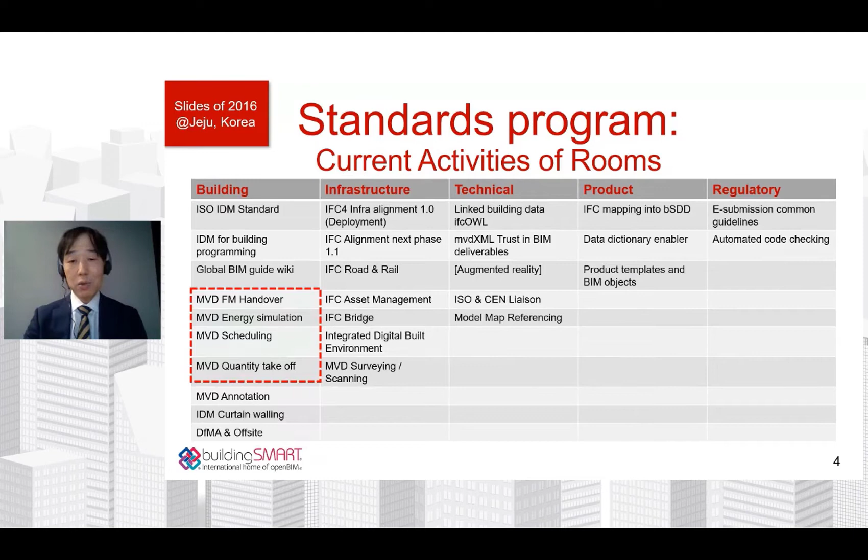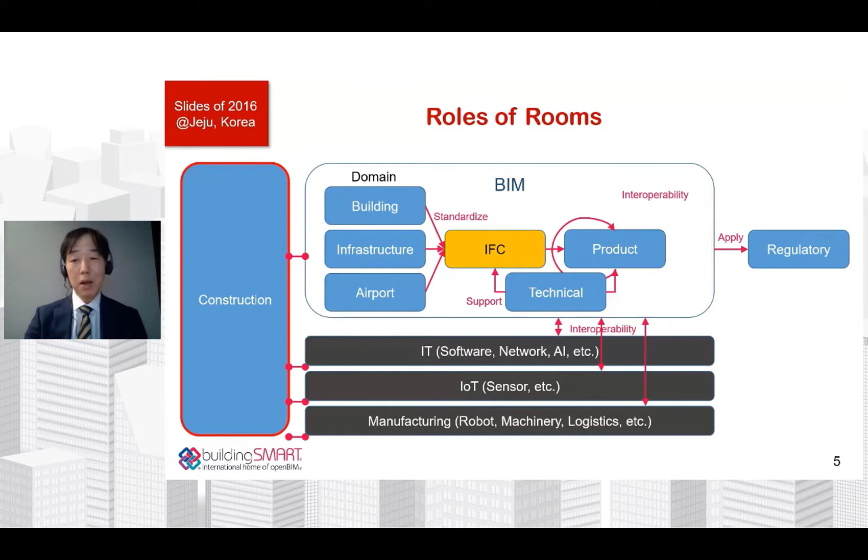There are many file formats and data schemas in each domain. So we started to establish interoperability between those data and try to migrate them at real construction sites. In one word, we try to start data management of construction site.

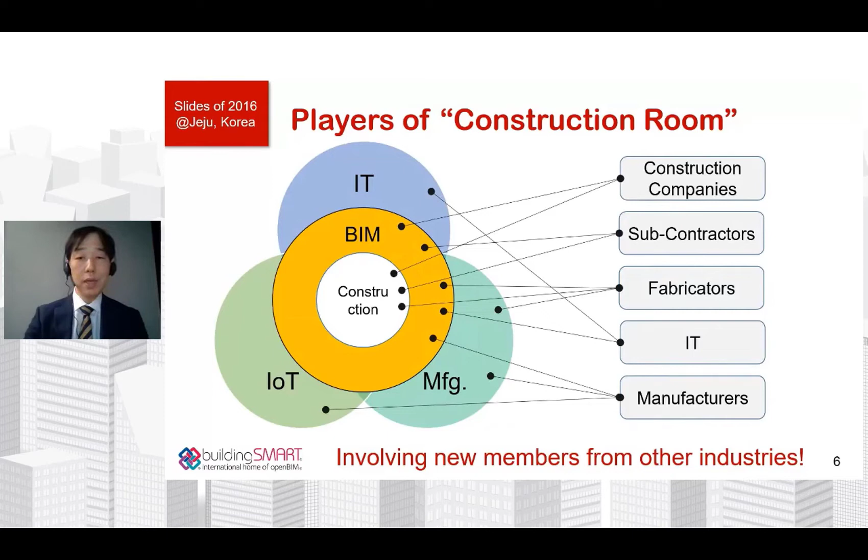So we assume that attendees of CR were not only from construction domain, but also from IT, IoT, manufacturing industries as well. So our targeted domain is not single, but a combination of different domains.

First one was BIM plus construction. 6 years ago, usage of BIM in construction phase and field was not as popular as today. We started to use the word construction BIM, and it has been rapidly spreading, and now it is recognized as a major part of BIM usage in building life cycle.

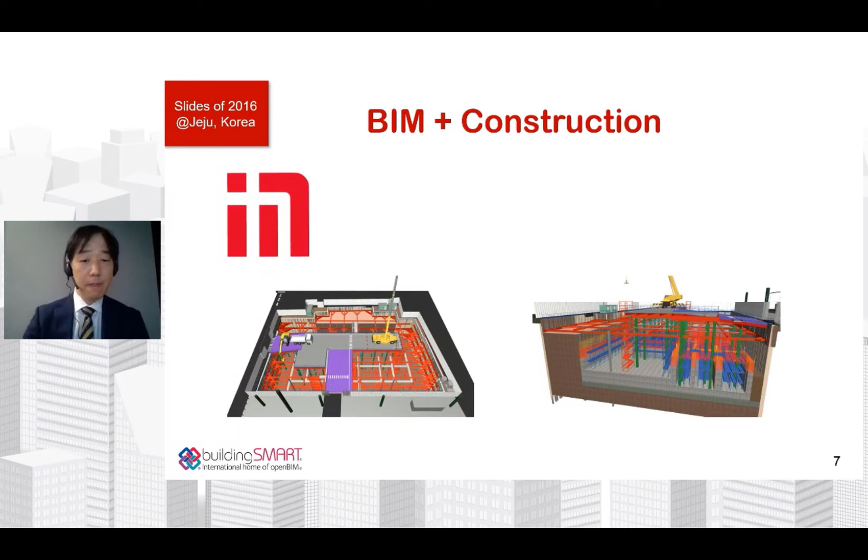Next is BIM plus GIS and BIM plus AI. TensorFlow was an AI engine developed by Google, and anyone could start to use AI and apply deep learning of image to construction domain.

Now, we have many cloud-based BIM tools which can attach and store remotely divided data sources and use many analysis tools online as well.

Next is BIM plus drone plus laser scanner. Now it is very popular to measure landscape with UAV, used in many civil engineering projects and large-scale building construction projects as well. Cloud-based automatic navigation systems, such as DroneDeploy, are used at construction sites as well.

Next one is BIM plus 3D printer. This technology is still under developing stage, but some construction materials, such as temporary materials for formwork, are created by 3D printer at factory, and some trial building automation with large-scale 3D printer has started.

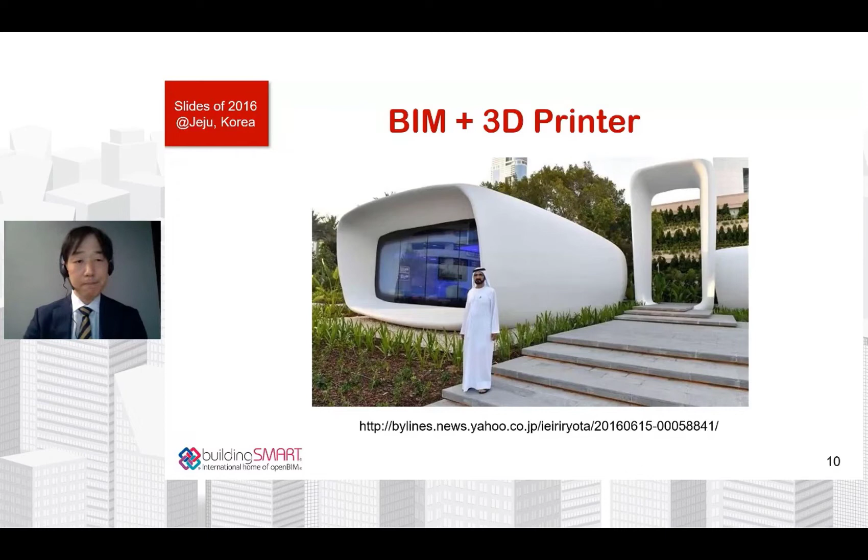Now, virtual reality is a handy tool, both cost-wise and operation-wise. But there were few use cases to use them in construction sites six years ago. Now we can use a variety of excellent tools, not only virtual reality, but mixed reality and augmented reality. I believe that IFC format had a big role to bridge BIM and XR technologies.

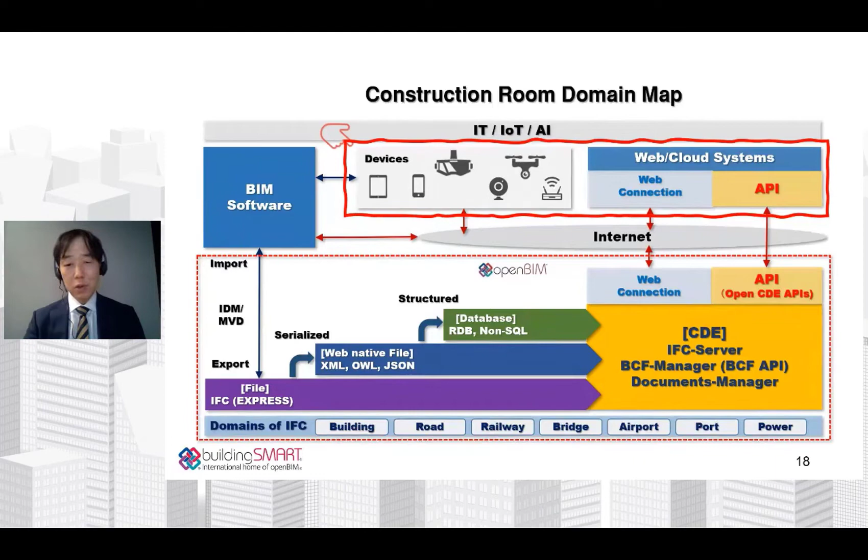From now, I want to present the updated construction room charter documents.

Construction room is categorized in user-focused rooms. We are fundamentally based on user side, helping to use IFC and related standards from beginner to advanced person.

Our field is mainly construction phase and pre and post construction phase as well, and we create open BIM based workflow.

There are our vision and missions: advanced digitalization of construction, incorporate forward-looking construction technology into the development of open construction solutions and standards.

Developed best practice of construction site management based on OpenBIM, and provide OpenBIM education to the industries.

We also have an approach to create the method for BSI standardization. First, share the use cases and store them to a use case management service, and create IDS, which stands for Information Delivery Specification, and MVD for extending use and interoperability of BIM data.

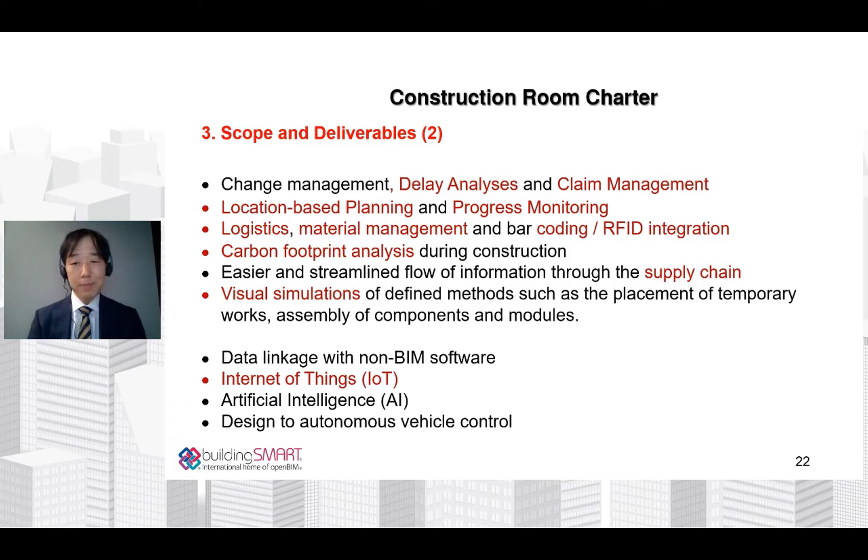If you are trying to establish construction room in your local chapter, please let us know. We can help to create charter documents and adapt your local activities.

Starting up the community is the first step, through which we can input our knowledge and receive many feedbacks from the construction field.

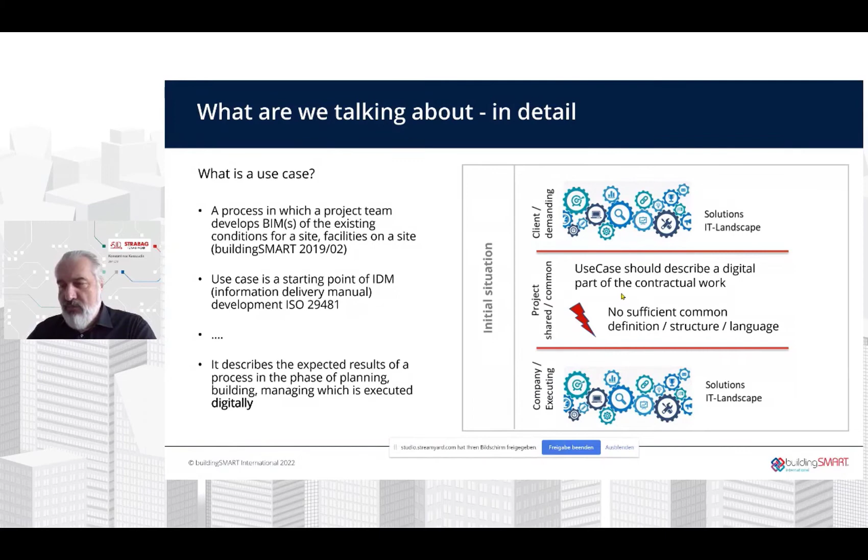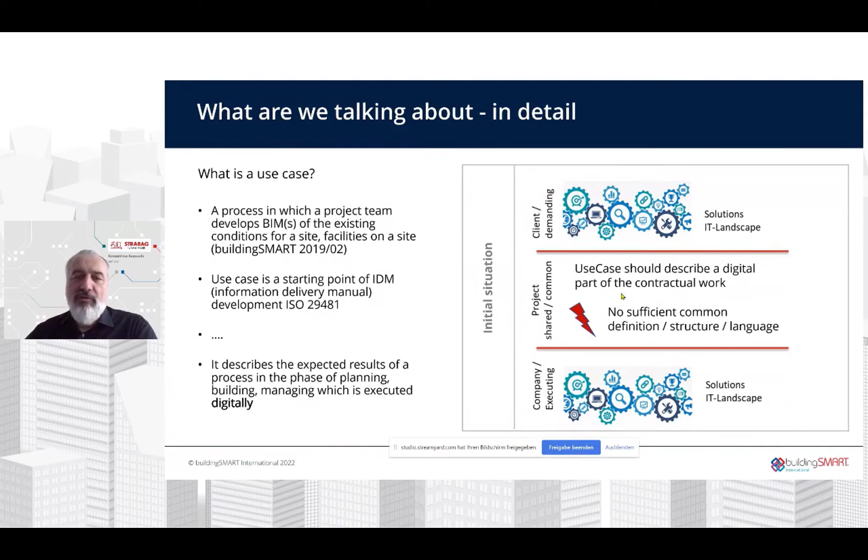At the moment we have BEPs and ERs written, and they are always written and executed individually, and this causes some difficulties. So if we look at the other side, what is the actual problem? If we have this insufficient common definition, structure and language in use cases, there is an impact.

The impact by the moment is that every participant writes down his own use case, which makes it difficult because all the people have to read all the use cases to understand what we do in the market. This makes it somehow difficult to connect company systems to fulfill the requirements described in the use cases automatically to our already set up solutions in every company, and we don't have the time to add or connect that solution always by hand.

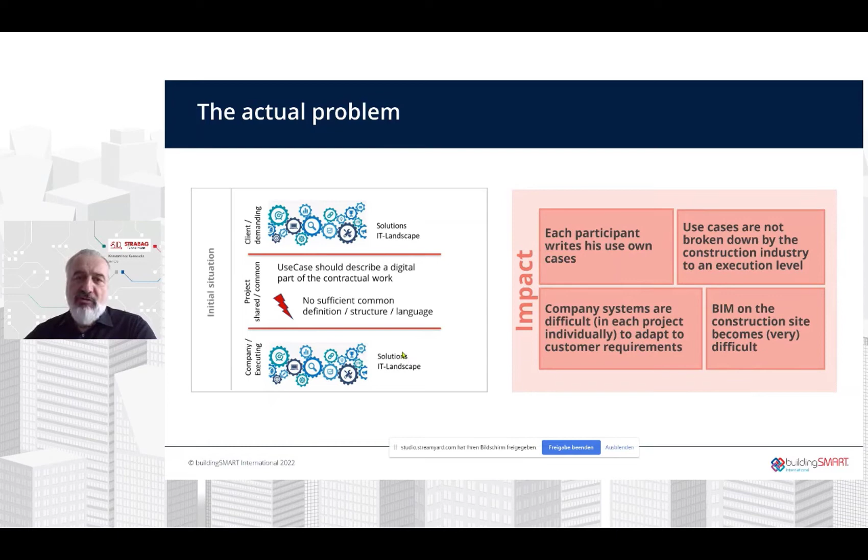The next problem we face is the use cases are still not broken down by the construction industry to an execution level, or by the planning offices to an execution level between planners. We have a big discussion ongoing on the high level about what customers require, but what about the execution level? In summary, this makes it very difficult to connect really digital solutions to a construction site, because on a construction site, as in the planning processes, we have a lot of interactions, a lot of processes going through companies, connecting companies.

So if we want to make this somehow better, this is an actual discussion happening worldwide: we have to define, we have to find a common definition of what is the use case. As you see on the right upper picture, a use case is a process, a frame of that. It has an input, an output, roles, skills to fulfill it. It's a digital service at the end we have to fulfill.

If we look a little bit in the middle of the project now, we see a structure appearing. And we need this structure to understand each other - where is this use case really allocated? Is it a use case defining what a client is asking for? Or is this, on level 3, a use case we share between execution companies to fulfill what the client is asking for? This discussion, by the moment, is I think still needed and ongoing, and will hopefully end in a common definition, structure, and more than that, syntax and semantics, so we can understand each other about what we are talking about and what it means if we describe a use case.

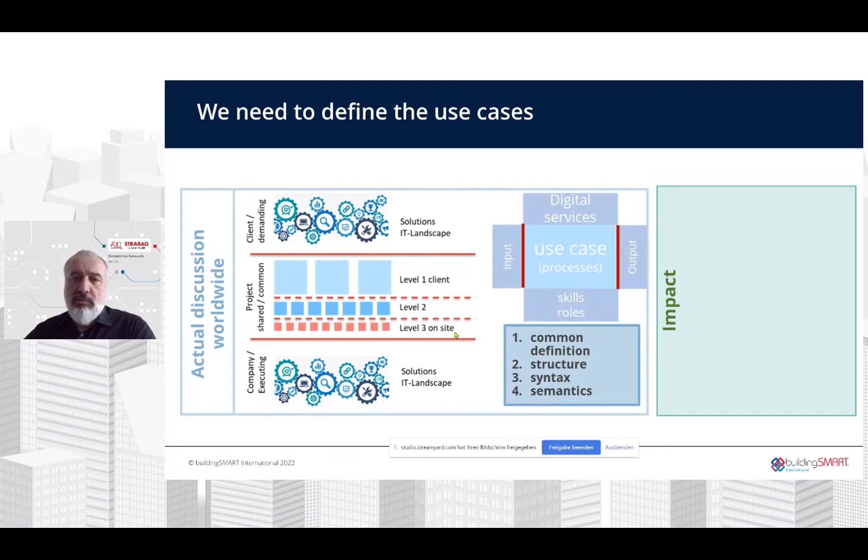This will have an impact too. The impact this time is a little bit better, is green. So the customer request is broken down to the execution level. So the customer sees at the end what is inside what he asked for, and how it is executed.

It makes it possible for us to have reproducible digital processes, and by this, a standardized connectability to the company solution landscape. The company solution landscape will always remain something internal, either client or execution company. But if the middle part, which is common and shared, is understood and agreed what we do on a construction site, it's much easier to connect our solutions there.

And this will help us establish process chains independent from company size to achieve this digital collaboration. Imagine if, by the moment, it's a big effort to always connect your solutions to the demands of a client on site, but also the demands of collaboration, even for bigger companies - how big is this effort for a smaller company who always has to connect itself to different general contractors, to different clients? It makes it really impossible, even for smaller companies, much more than for bigger companies. So therefore, I think it's a very helpful and needed thing to make this digital process chain really happen in the construction industry, or the construction sector as a whole.

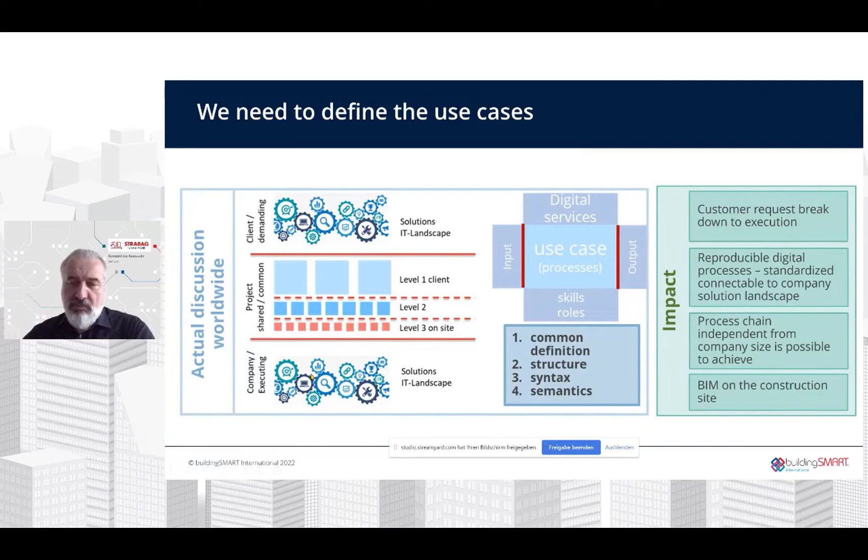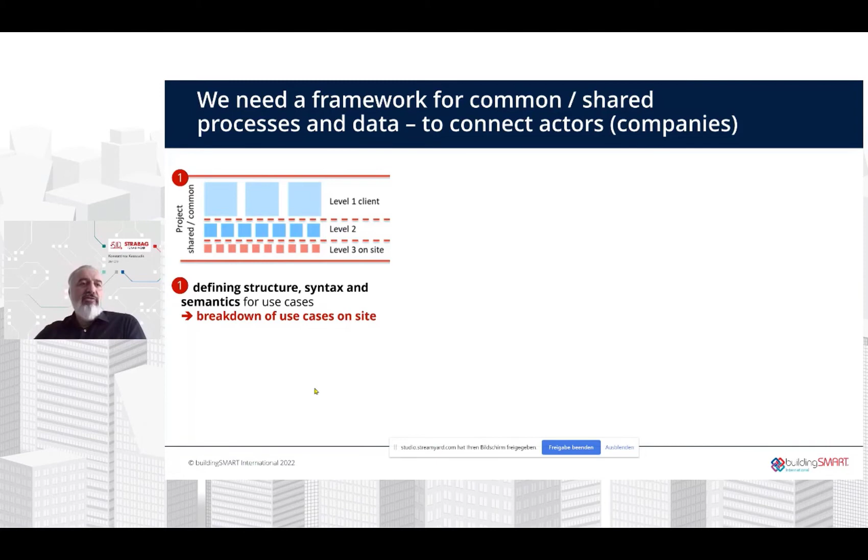So if this is what we need to define for use cases, and we are working on that, we have to think one step further. We need a landscape, a framework, to connect processes and data to be able to really execute that. So if this is what we want on the top level - this is what we want to achieve. The first thing, as I discussed, is defining a common structure, syntax, and semantics for use cases, and to make this breakdown of use cases on site. This is ongoing. Once done, or meanwhile we do this, we need a platform.

We need a platform to store all this information, and we need a concept to get from structured document to these steps, totally to the right, to machine executable data model. And we are still not there. We are at the beginning.

If we don't start with a structured document, we will not reach the next step, which would be a machine readable document, and then machine understandable content. We need syntax and semantics, because to understand something, you have to make it understandable. Once we've taken these steps, we can achieve a machine executable data model, helping us make these connections faster, more efficient, and of higher quality.

This is a part I think we discussed already in use case management, buildingSMART. I thank the colleagues very much for setting up this use case management platform. I think this is a very big move from buildingSMART to start here with structured documents and discuss the next steps of functionality and services within buildingSMART.

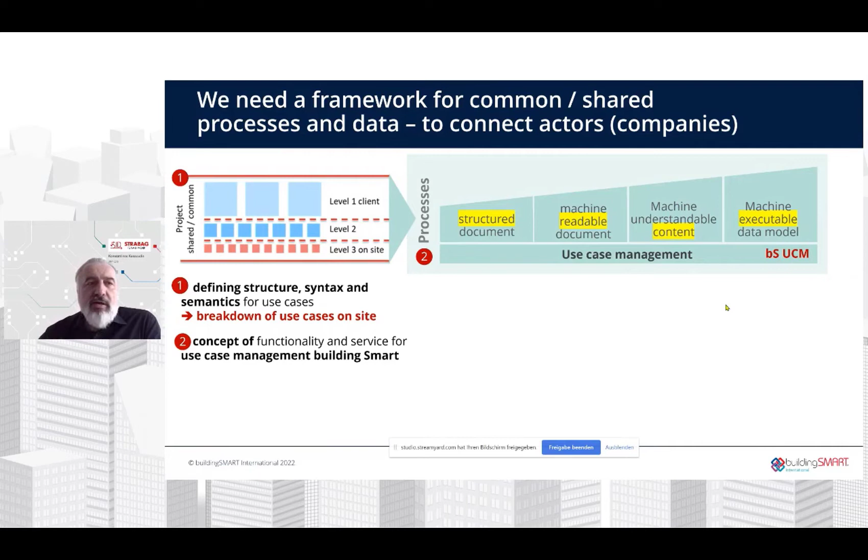But if we have the processes, at least the public and common and shared processes defined, that's not where we want to stop, because what we need more, to have a complete solution, is to connect processes to data. There you see also the big importance of these process definitions. The process definitions give us a filter for all the data we have.

We have a data sea, big data pools, and we can't handle these data pools if we don't have, as a criteria, at least a process criteria, the use case management to give us a breakdown, a concrete selection of data we need for the specific process. Therefore we need a concept of functionality and service for data to be filtered and connected by use cases, to fulfill them. This is a very big thing we have to discuss, I think, in the future.

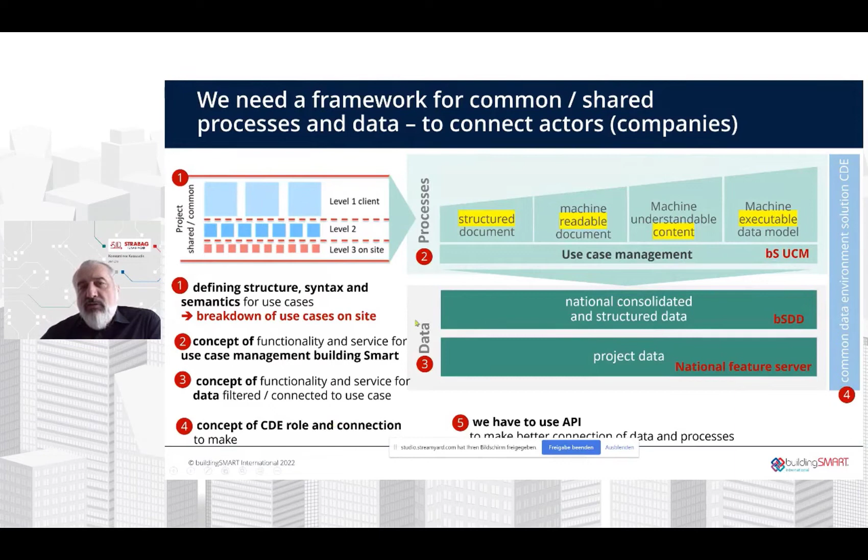So this is my proposal, my presentation to give you an idea about the importance of use cases, and why we are asking all the examples we do in the construction realm to be reflected as a use case on the use case management platform.

As a summary, use cases are one of the most key elements of digital processes. They are, to my understanding, the key to common understanding of what we do on the construction site, so as not to end like the example of the Tower of Babel.

So as they are shared between all participants, they must be described on a platform, a common and external platform, to achieve at least the most important three things we have to achieve to make this smooth collaboration on the construction site.

We need this common understanding of structured processes as described. We need this to be able to make a repeatable connection to the IT landscape and solutions of all participants. And this is the base for digital logistics and fabrication processes on site, shared by all execution companies and all planners. Otherwise, we will not be able to do that seriously.

So the ongoing discussion, as I've shown you, is still ongoing about how to structure and define the use case, but this will come to an end soon, I think. Once the ongoing discussion on a common definition of use cases is finalized, I see a great demand for a functional use case management, best connected to data management, and this will progress very fast.

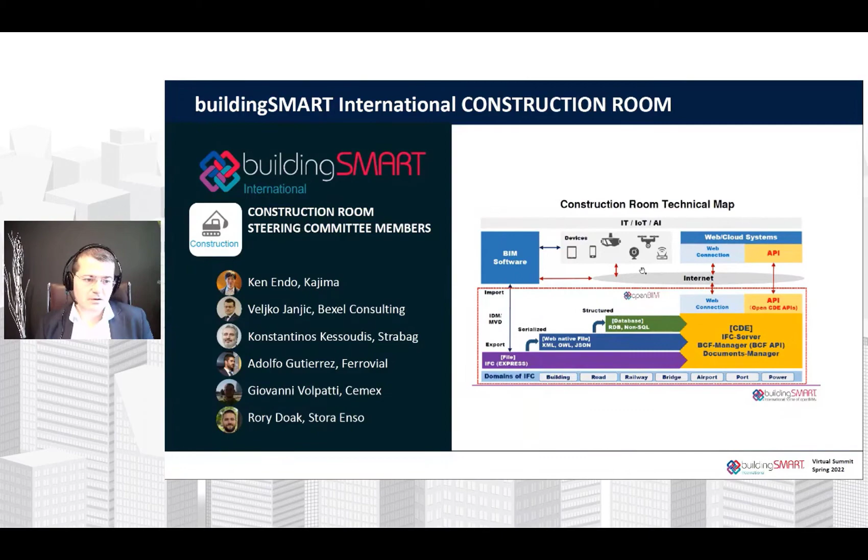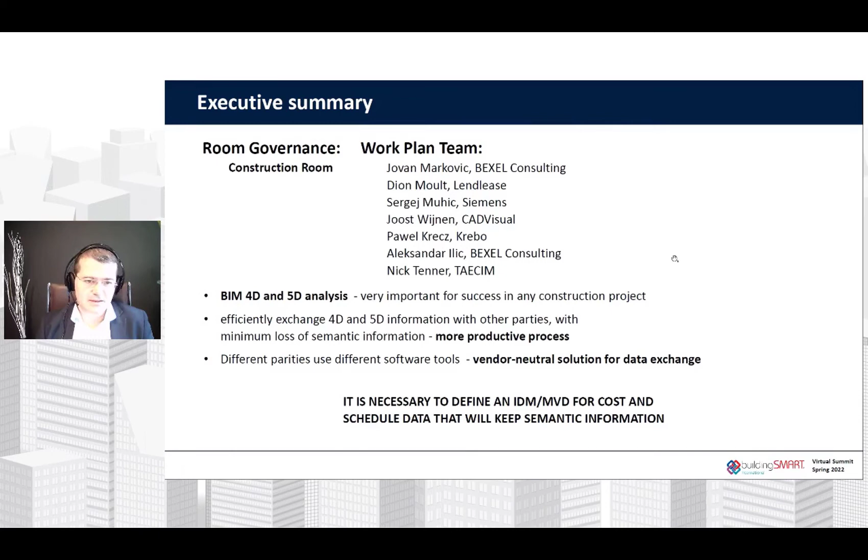As this is our construction room, the project for IDM and IFC enhancement is coordinated by our construction room. Here are some members of the team who are essentially involved in this project today. I would like to invite you all to join if you want. I would especially like to thank Dion and Jovan for their great contribution to what is currently developed in the IFC standard and what can be enhanced in the future.

As has been said a number of times before, any new standard has to be fully neutral and enable interoperability between various tools and platforms. It also has to be fully robust, so not dependent on any company or region-specific standard and common practice. For these more detailed structures which can be localized and more specific, we have, of course, an excellent option to use BSDD. There are also some ideas which might help in the future to slightly enhance BCF.

For example, for BIM-based look-ahead plans or progress monitoring, tendering packages, and other use cases, BCF could be very useful. It needs to be slightly enhanced in the future if possible, and this will allow us additional flexibility.

As Konstantinos mentioned, everything starts with use cases. Today we have many stakeholders, and what I have to emphasize here is we also have a lot of changes and updates. And if we cannot have any automation of those processes, any templates, any standards, it's going to be very difficult to manually handle those changes. So one of the big ideas, which we've discussed many times, is to have the ability to have an IFC incremental model.

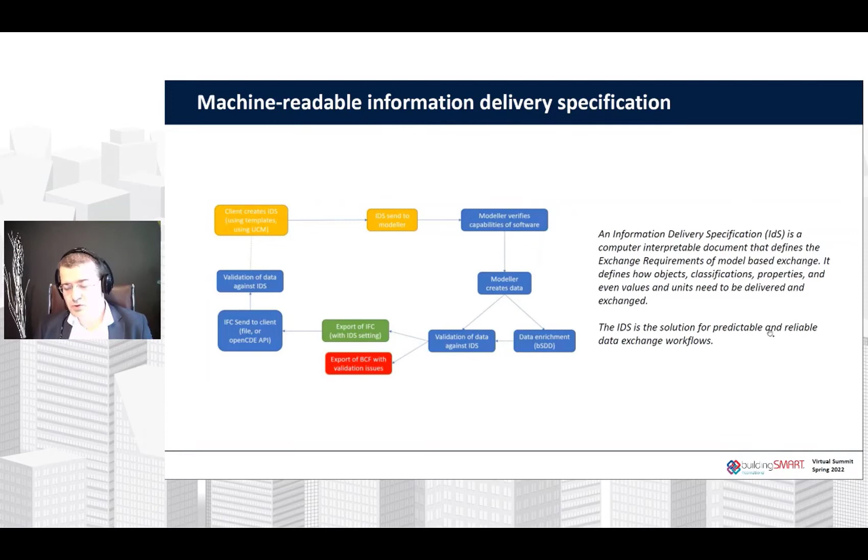Leon also mentioned yesterday about information delivery specifications, and of course they are crucial, so everything we develop has to be within this framework. BSDD is another topic mentioned yesterday, and of course, especially for some local specifics and local standards, it is crucial to use BSDD. I'll show you at the end some short examples of how data enrichment can help us.

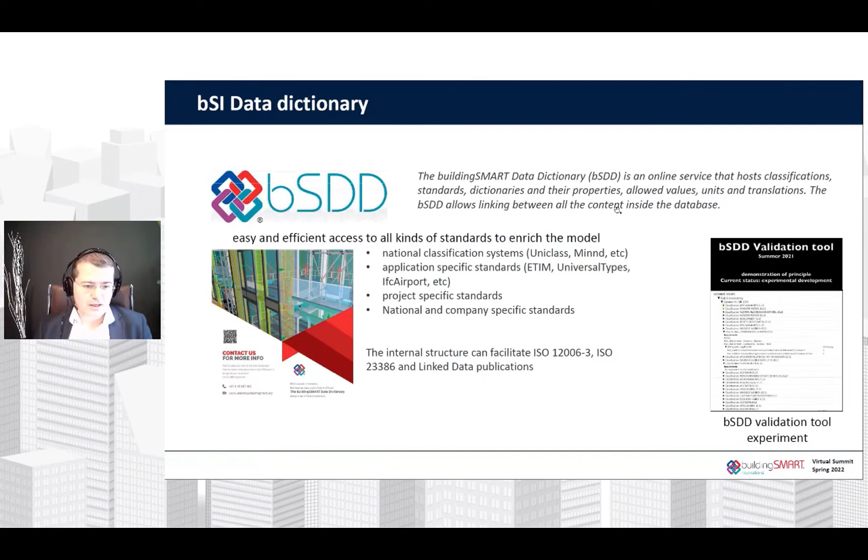Konstantinos already mentioned about use case management. And of course, the idea is to have everything integrated.

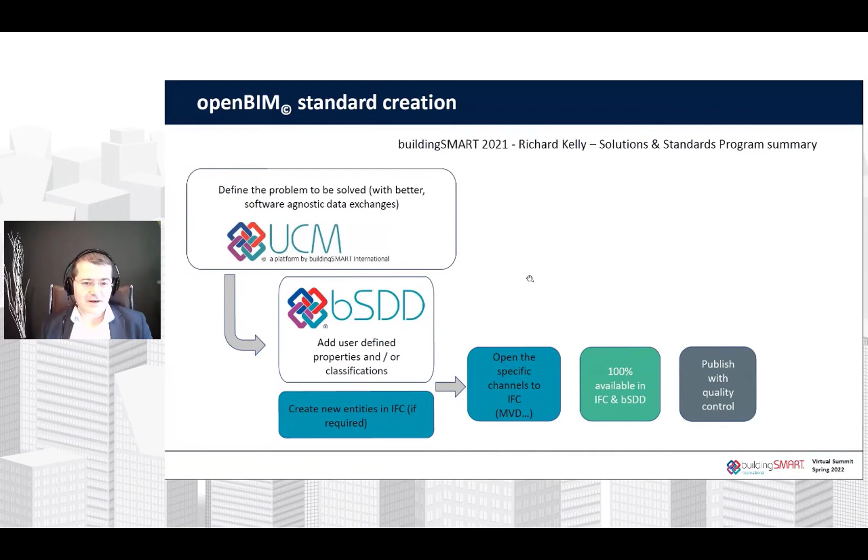So I will just briefly mention the phases of our initiative. Phase 1 is 4D IDM, then enhancements, exchange requirements, and so on. Then we have phase 2, where we are discussing 5D, so cost, resources, and so on. Then we should also have integrated 4D and 5D in the planning phase, and 4D and 5D integrated in the construction phase, and optionally also some enhancements of BCF.

And of course, the idea is to in parallel coordinate our activities with other rooms within buildingSMART International, and to give ideas for future enhancements of IFC and BCF, especially related to 4D and 5D.

So these are some existing schemas we have. Maybe the key challenge today is what's happening with the updates, and I'm going to refer to this several times. So maybe we have end results at the moment, and some small improvements we can have in the future, but the key challenge is if we are transferring the data from one tool to another, more or less what we are going to get are mostly end results.

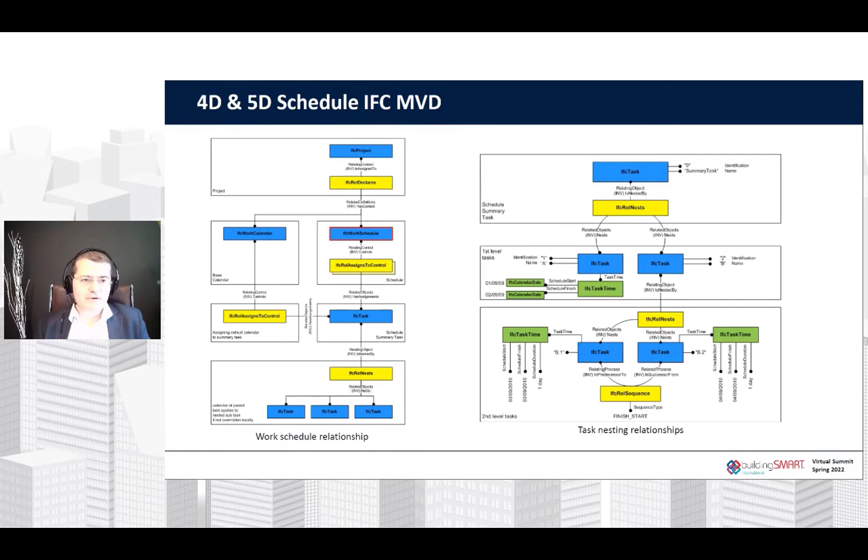So if in another tool we update the model, we are not going to have an updated cost estimate, because there is not enough semantics, or the system won't know to which task newly added walls, for example, should be attached. So the challenge is what is happening with the updates, and the key problem when dealing with updates is that they are very, very frequent.

So there is no project where there are no updates.

So this is a schema we already have. You can see existing IFC. So we have plenty of information for the cost and scheduling domain already available, and this is a great, valuable thing today.

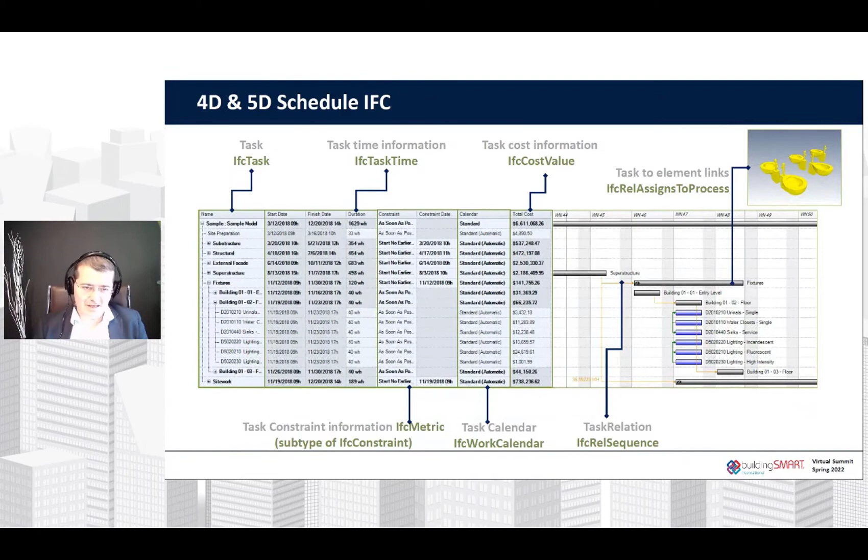Unfortunately, as I said, when we transfer the data from one tool to another, maybe it will look very nice in the beginning, but with the updates, it's not going to cope, because simply we are not transferring enough semantic data at the moment.

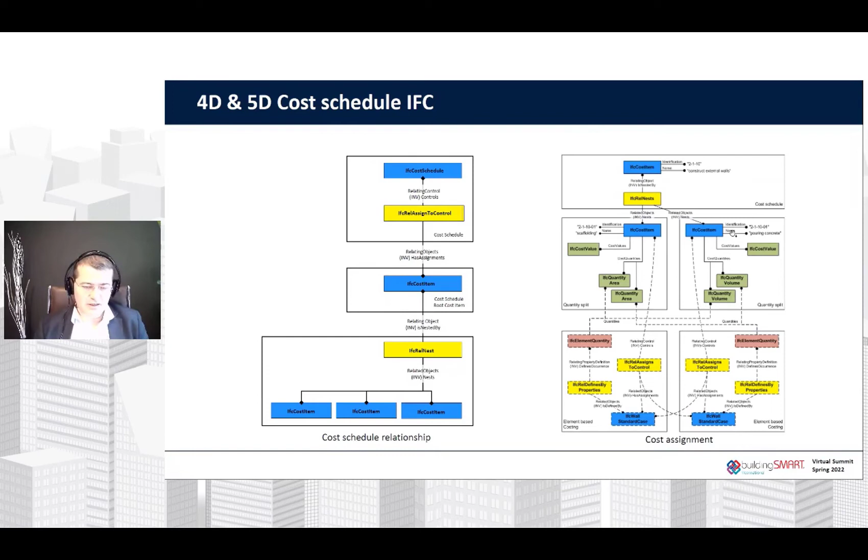So this is, again, a cost and schedule capability. We have this cost value and cost item, but unfortunately cost value is more like an end result. So we don't have some things which I will mention later about BIM queries integrated at the moment.

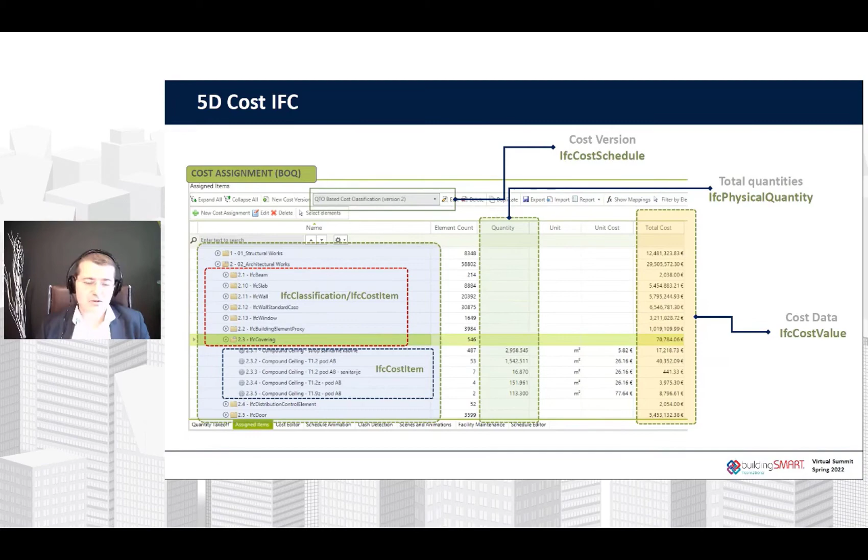The same goes with the 5D cost. The only thing maybe missing at the moment is that we don't have clearly defined what is called the cost classification structure, which can be, for example, Uniformat, used on a number of projects. But then we have a special project cost structure, which is usually unique for each project. More or less, unfortunately, it's mixed today, and we need to develop and use more classifications, but we need to clearly define the use cases and differentiate those two things.

So there are some specifics in terms of standards. One thing is, for example, in IFC 4.3, the idea is to define a specific user order of the elements which has to be done with the task. And it works well, and it's good enough for the beginning.

But the problem is, for example, if we have a road, and we are using IFC alignment as a direction, how is it going to order the elements within the task? If we update the model, the system will not know that order, because it was just manually entered, let's say, as GUIDs or something like that. And if we update the model in another tool, we will lose that information, and we have to do it manually.

So more or less, this is a key example of what is achieved today, but it's only useful if we are just transferring something which is not going to be updated. If you want to have a flexible system in the future, we need to add this direction and enhance this. Of course, it's not easy, we need to add plenty of things just to add direction as an order of activities.

So then we need what we call, at the moment temporarily, BIM queries, for example to add this to any of the tasks.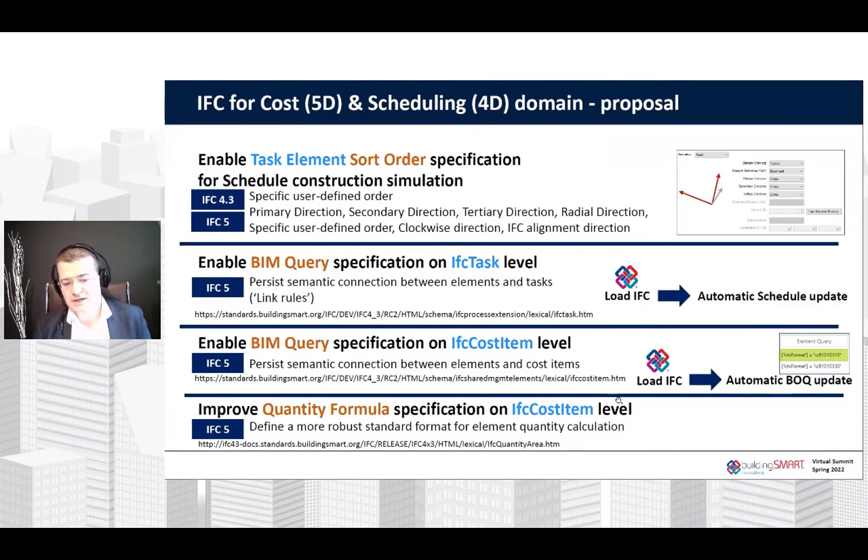So it helps us automatically create new cost estimates if the model is updated, not just seeing end results. Then there are some other tasks, possibly cost classification item. This is a company standard, country standard, or anything else related to a global cost item we are about to use on a number of projects.

Then we already discussed this in IFC 4.3, but it was not feasible to finish this color legend concept, and then some advanced functionalities and so on. What was finished within IFC 4.3 was predecessor task, calendar, or successor.

This is important for task relation workflow. It's more or less mandatory, and if you don't have this information, this could cause different Gantt charts in different tools. Another thing is to have a specification of constraint priority - is it on the project level or Gantt chart level, as late as possible or as soon as possible?

There are some other things which could also be discussed: IFC task and cost item, then relation to baseline schedule, which allows us to produce earned value analysis for various cost, performance, and schedule performance indexes, and so on. For location-based scheduling, we could also have this relationship between the task and the zones, and possibly in the future even task methodology.

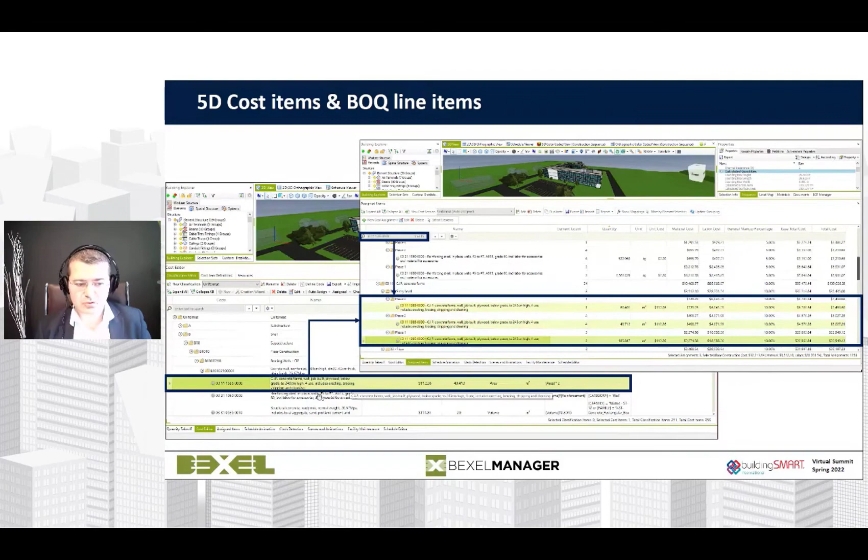So here are some examples to briefly go through. In this case, you see that one cost item in a cost structure could have more cost items or BOQ items in the project structure. So we can have the same type of form work defined on different locations, and it's not necessarily a good option to manually have all these items in this cost structure. It has to be in BOQ items. This allows us to change all data just once and immediately see the changes at the end.

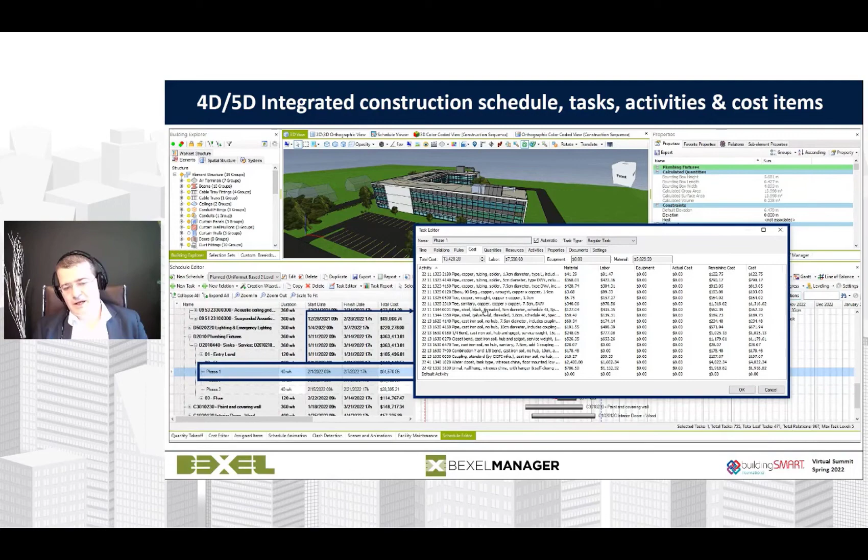The next thing is also the ability to connect cost items with tasks. It's theoretically possible, but it is not used at the moment. Unfortunately, a lot of tools which support project management do not have this concept fully developed. This is very useful, especially for construction industry projects, and very useful for material procurement analysis or activities detail, allowing us, whenever we update the model, to immediately have updated structures.

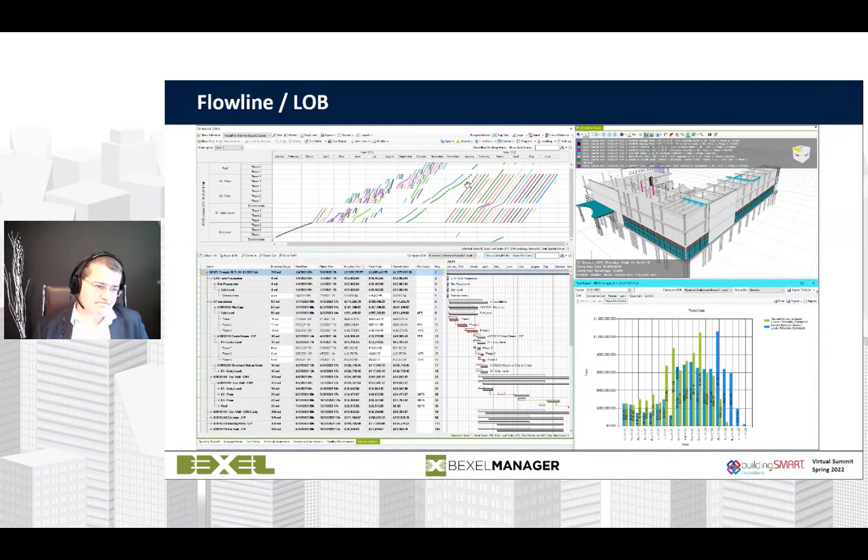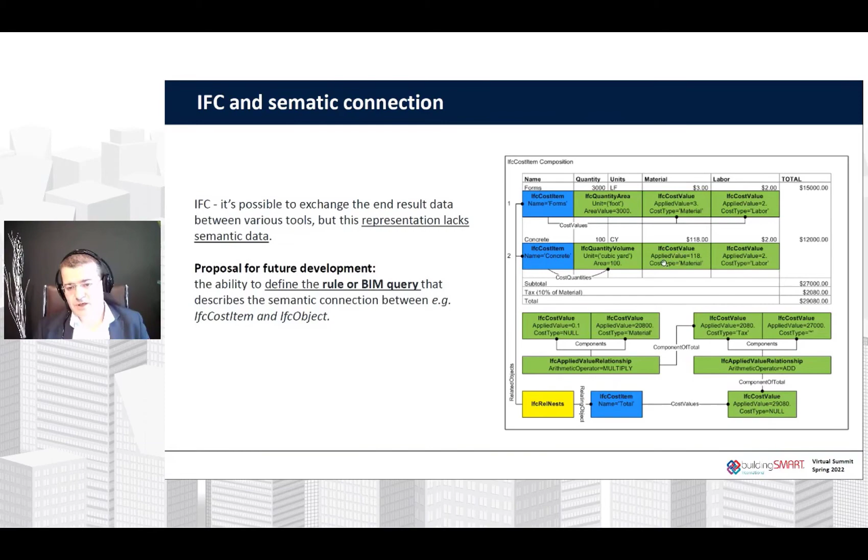As I said, location-based scheduling is also a nice use case, which can be arranged with IFC zones and additional information attached to the task. This is a great example of how an end result could be generated at the moment using IFC cost item and cost value. The problem is that we don't have semantics, so this is more like an end result - not full semantics behind, so whenever you update the model, it won't update automatically.

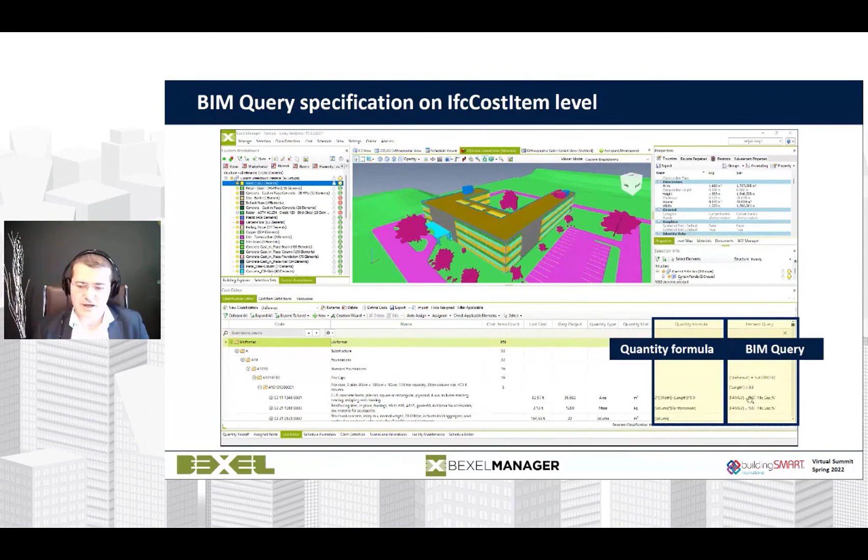How this could be achieved is, for example, having in cost items a quantity formula, then we could have special IDS checks, so we can check if all properties which fulfill that criteria have all these properties, so if the quantity can be calculated properly or not. And then we could have a BIM query as well, which is very useful for analytics.

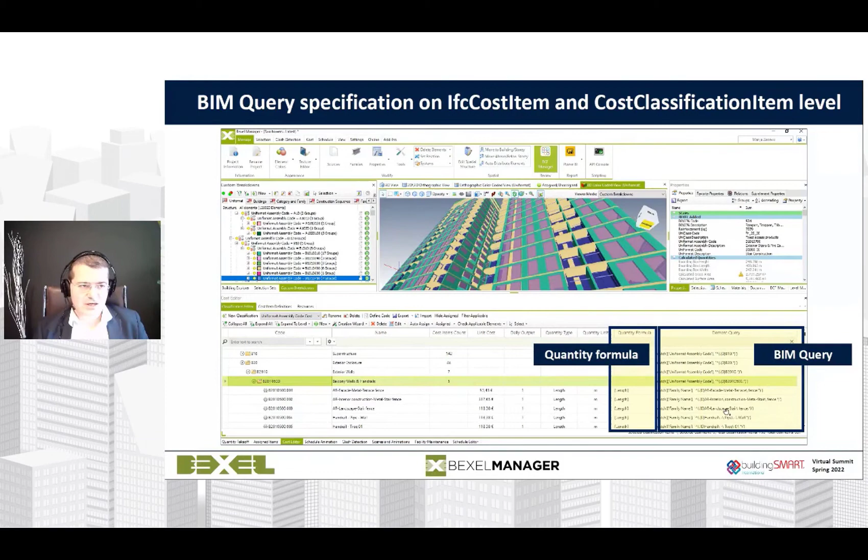So these are different examples - this could be beam-based, IFC-based, uniformat-based, so you can define different types of classifications and have those queries and cost items. As I said, the key use case is that you have a cost editor, and whenever you update the model, new IFC files are coming, and immediately the cost estimate is updated because you have everything predefined here.

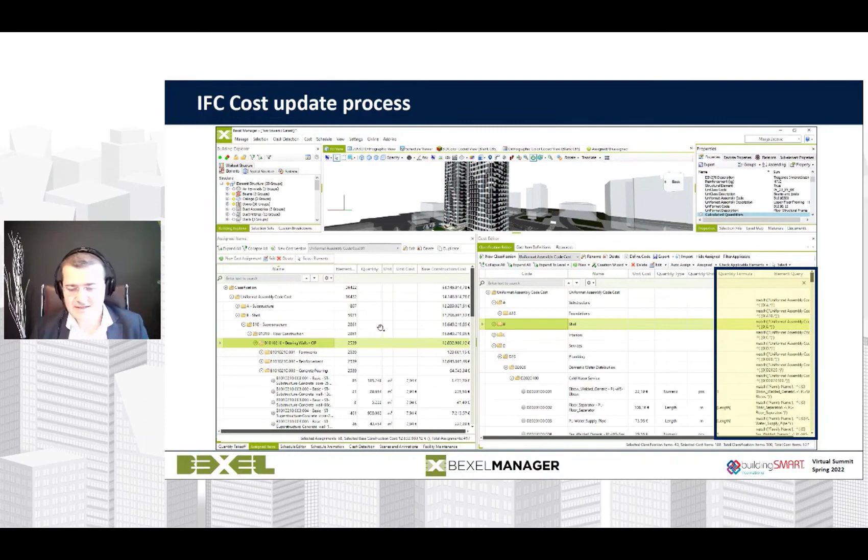The same goes with additional cost - like taxes, other costs, and so on. Just to move forward, here's another example. You have a 201 element, the cost estimate is calculated, the model is updated, you add new elements, and immediately everything is changed.

So this is a use case we would like to cover, using quantity formulas and element queries connected with BIM-based cost items.

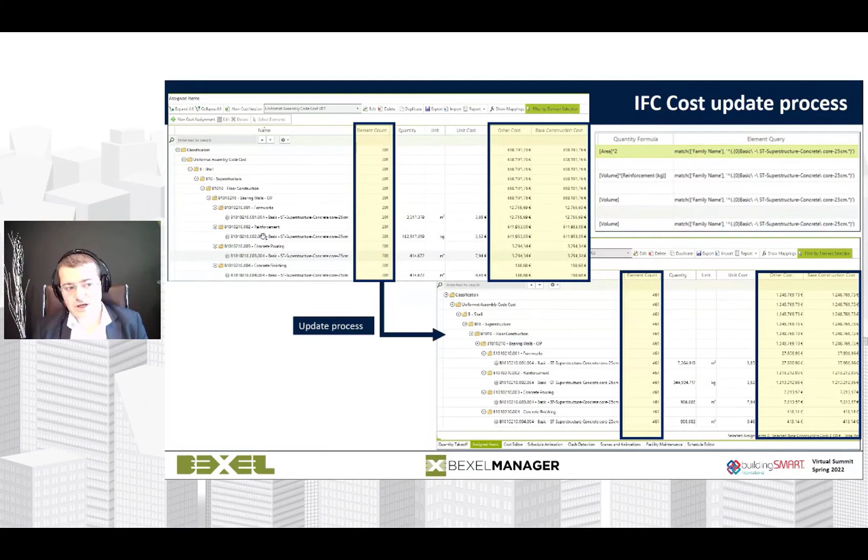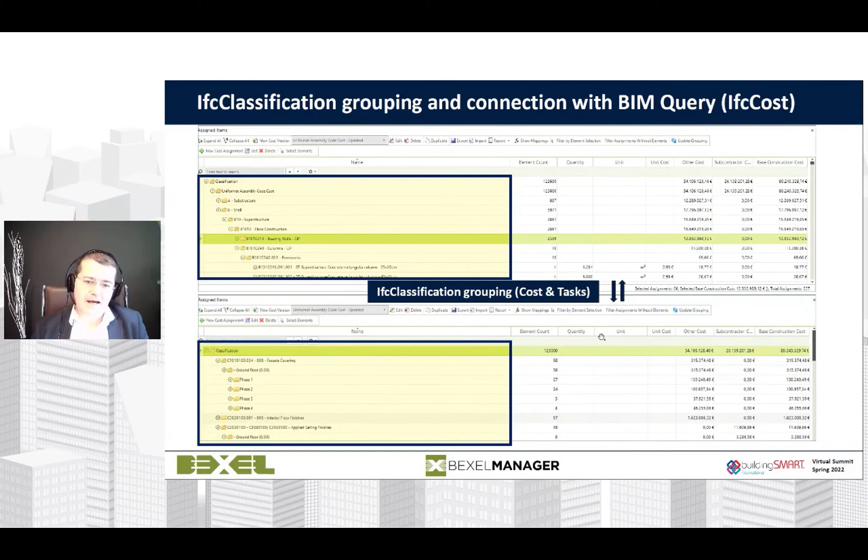Next, we could discuss having different groupings. For example, this is the same cost estimate with the same totals attached to each element, same tasks or cost items attached to each element. But we might need different groupings for tasks versus cost items and other classifications—some sort of IFC classification group. Here we're organizing this according to 3-4 levels, and in this case grouping it another way. We'll have the same result, but visually it will look different and be analyzed differently.

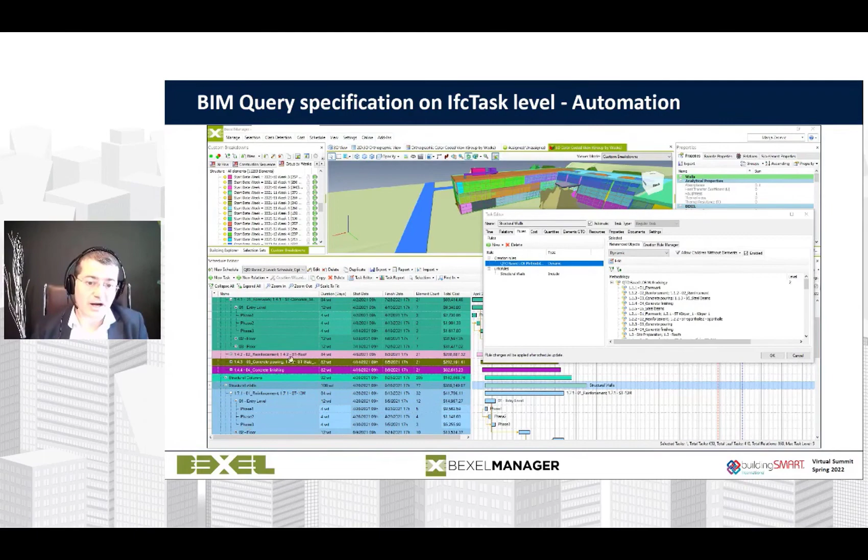The next thing is that we need to add groupings and query information to the tasks, which will allow automation when updating the element. For example, in our implementation you have creation rules and link rules, so whenever you update the model, it will automatically create new tasks, new relationships, or update the costs and elements attached to the tasks. This is an updating schedule process—if properly set up, whenever you update the model, you'll immediately see a new number of elements attached, a new task can optionally be generated, and of course cost and everything else is updated.

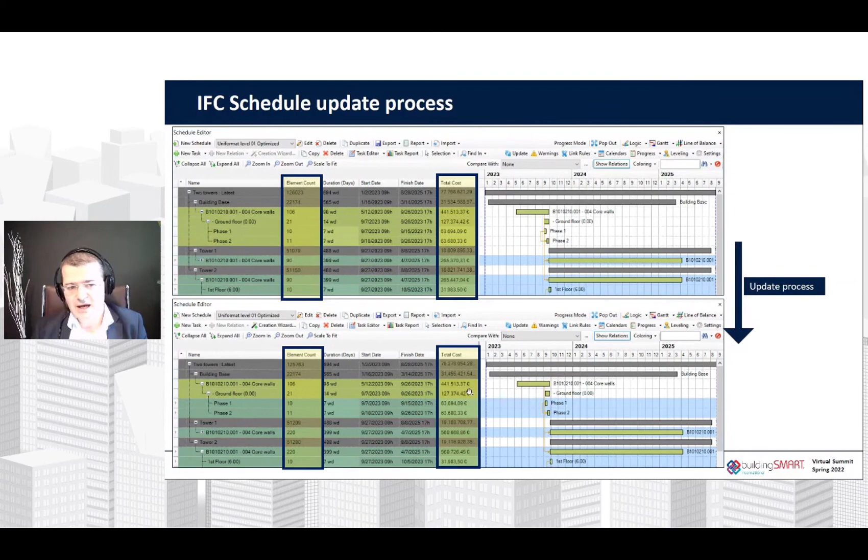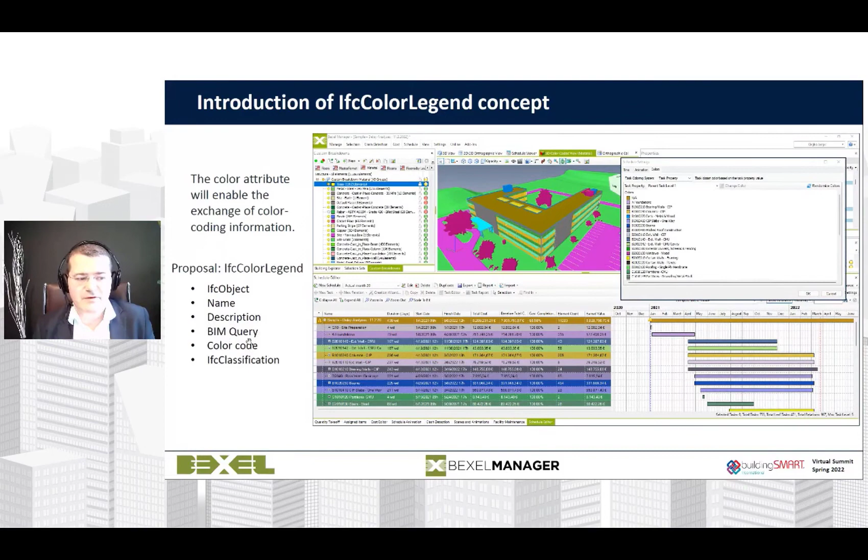Another thing is the IFC color legend, which we discussed. Essentially, to any IFC object—could be an IFC task or IFC cost item, but in general any IFC object or element—we need something defined which could be called a color legend. It could contain the IFC object; this is still preliminary and we'll discuss it further. It would usually have a name, description, and importantly a query. You need a color code, and optionally it could have more levels, so it's not just single-level color coding classification—it could have more levels.

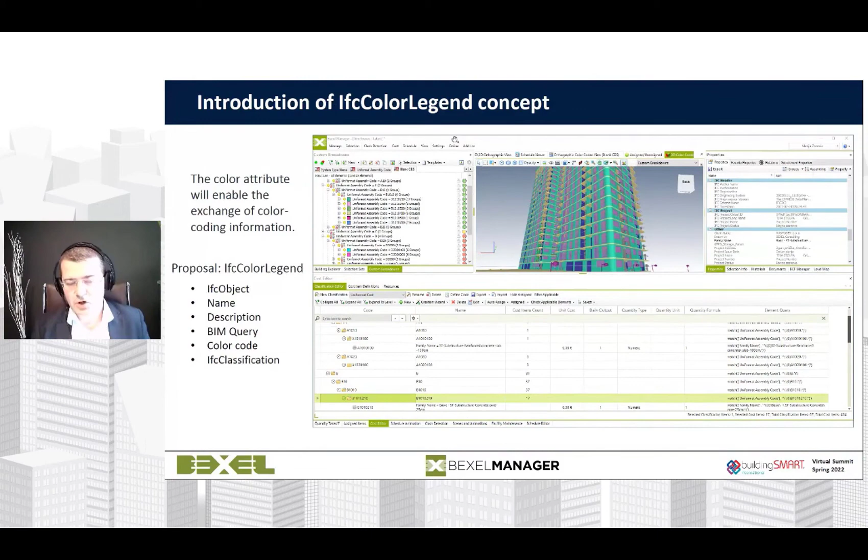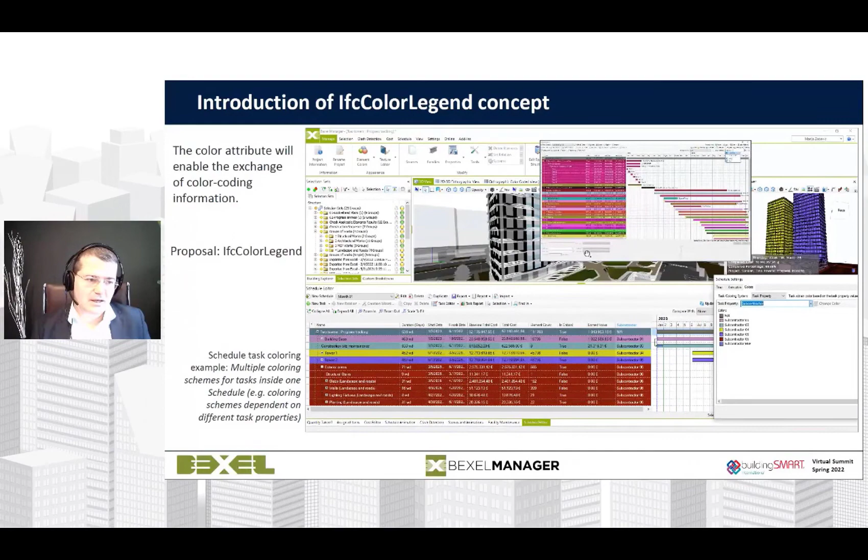The idea is that today we can transfer information about the colors of elements, but if you don't have the query or rules for how this will be colored when we update the model, we will lose that information. The concept of color coding could be applied to tasks, cost items, elements, and other things. This is an example of color coding of tasks, and another useful use case—color coding of elements per assembly code and so on.

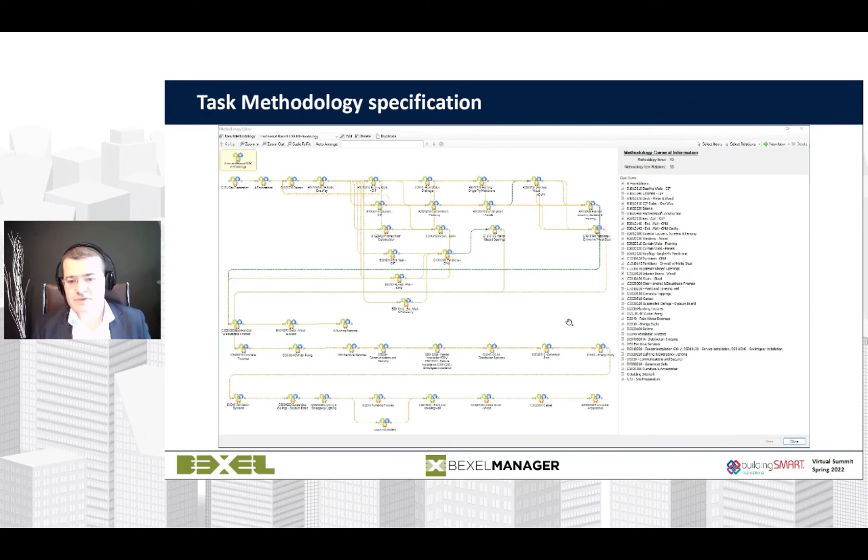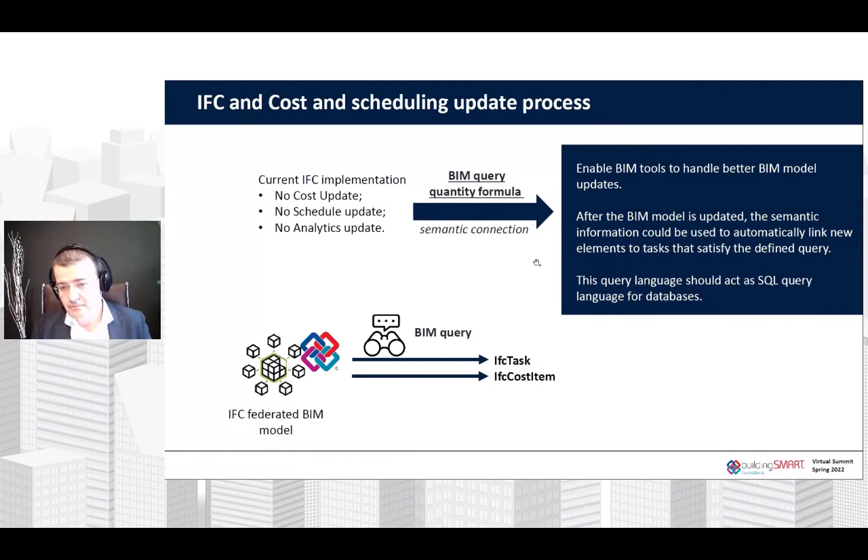At the end, another interesting thing is further automation and increased productivity—for example, adding task methodology specification, which with queries could be attached to elements and have a scheduling logic or methodology, as a template for how you're going to build the project. So to wrap up, with queries we could have plenty of automation, and with other suggested functionalities in further development, we could have improved workflows, additional semantics, and much easier handling of changes across different tools.

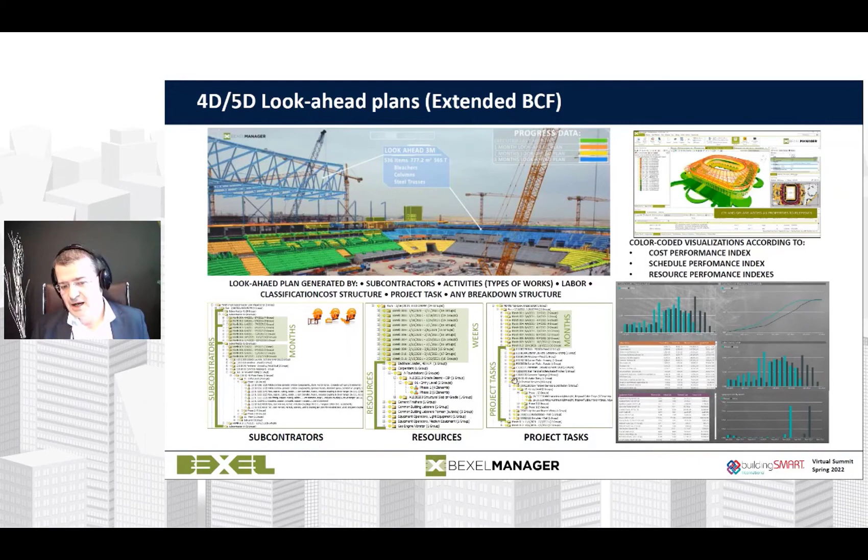For the future, something also interesting for look-ahead plans could be an extended BCF. We have automatically generated selection sets, which can be saved as a BCF in a different structure, organized by subcontractors, resources, and project tasks. What's missing is plenty of folders or subfolders automatically generated—it would be very useful if BCF supported any classification, grouping, or at least a folder structure, because then this communication would be much smoother.

At the end, we could also discuss—that's why we mentioned the baseline schedule—earned value analysis, cost schedule performance index, and other indexes, which are very useful for project management and analytics of projects.

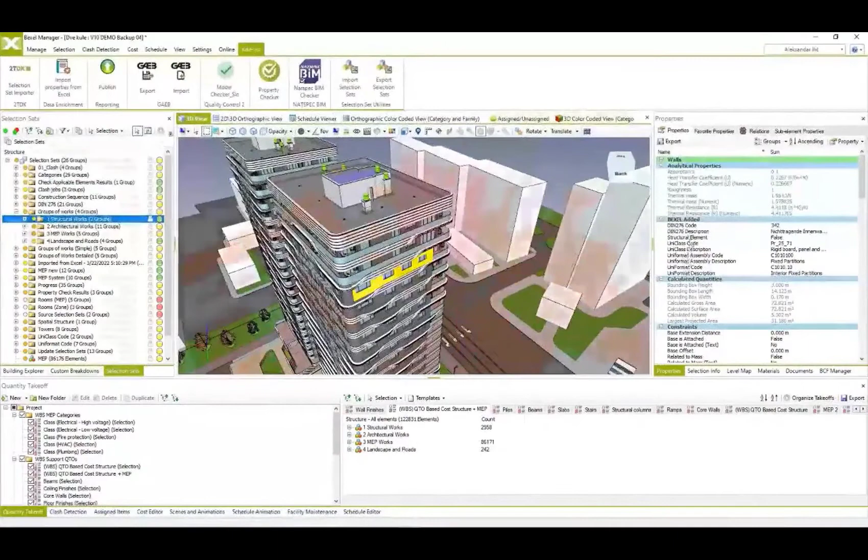In this video, the model was automatically imported and enriched with, for example, Uniformat assembly codes. Then directly in Bexel Manager, using a simple knowledge base, which formulas and templates should be used in Excel, so very open and easy to read.

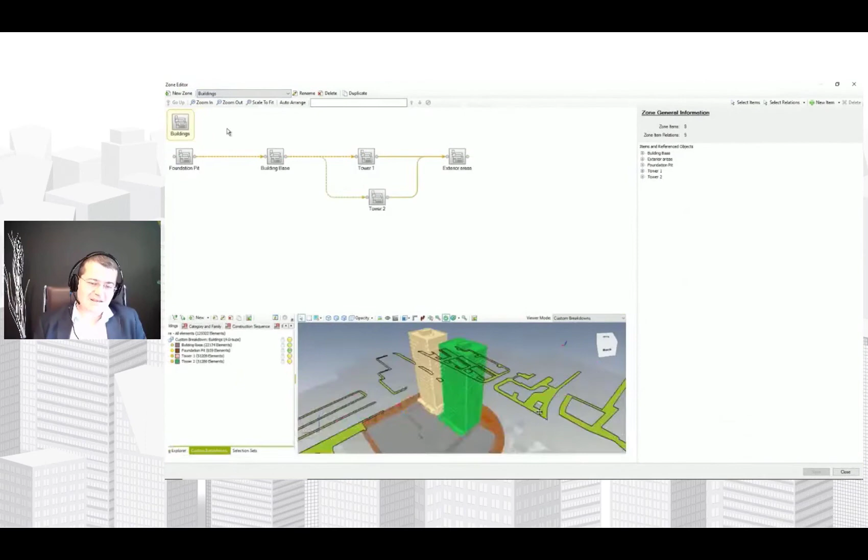The system automatically creates the cost structure because it uses all data coming from IFC. When you receive the bid from the contractor, the entire cost estimate is automatically generated. But what is very important, you have a cost database behind, automatically generated from IFC.

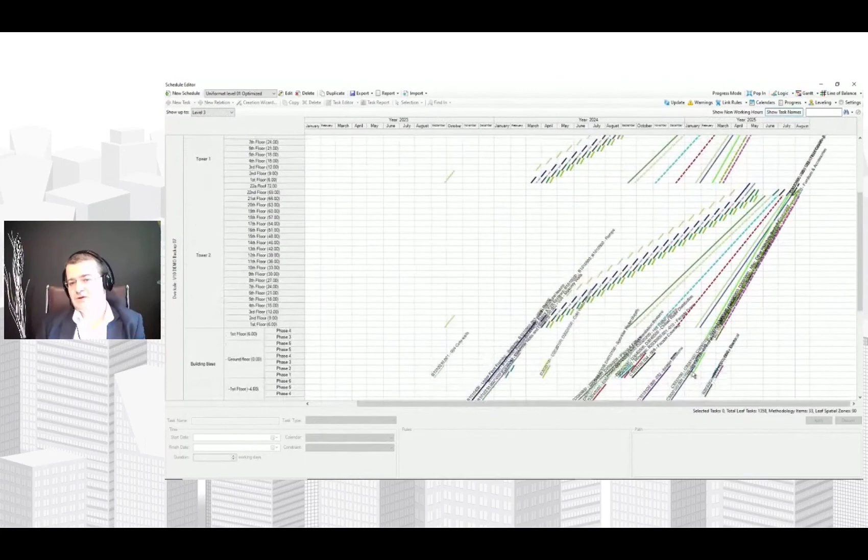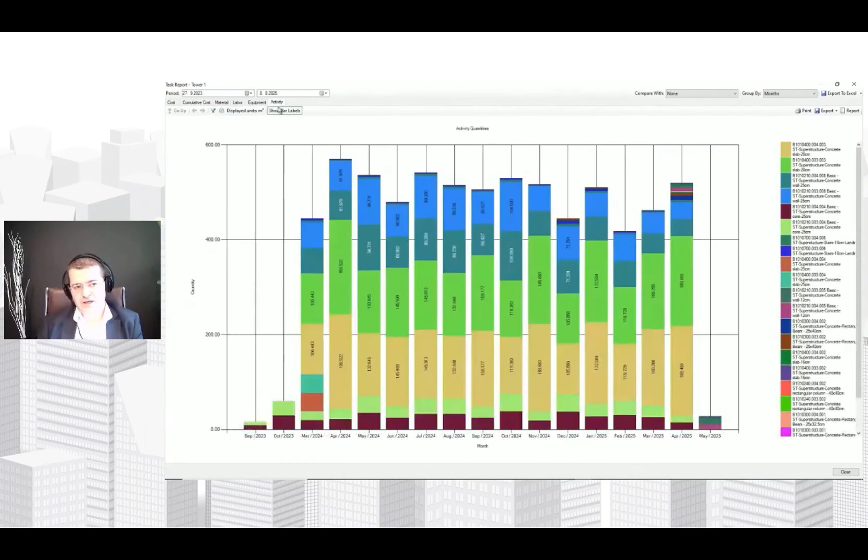And literally you will see tomorrow how from a basic IFC model you can automatically create cost structure, and then using tailored construction methodology, automatically create the Gantt charts. This full automation can help us to immediately have, in 15-20 minutes, Gantt chart simulation, cash flows, and resource usage analysis, which helps us in material procurement and so on.

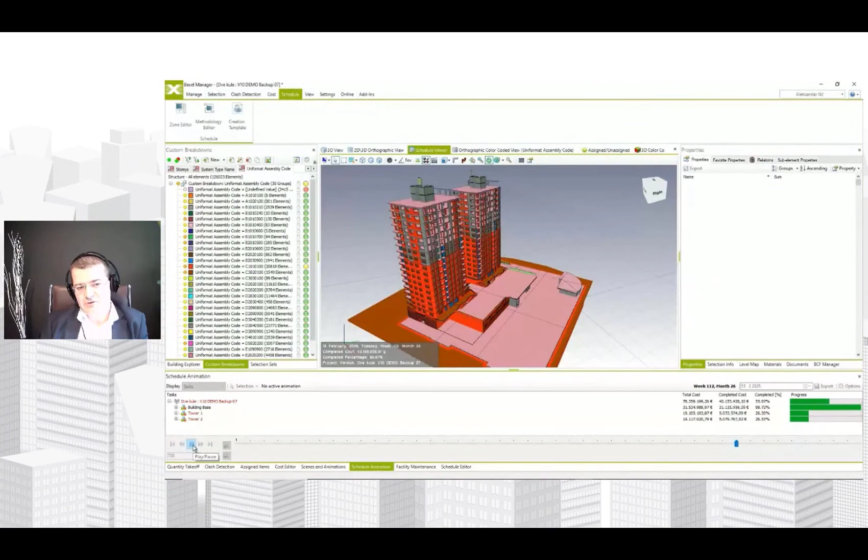And at the end you have these nice animations. Of course this is just the end result - the key is the data behind. This can be exported into IFC, and you can exchange the data. You will see also how this is transferred in this case to our online application, Bexel Viewer. Again, the idea is to have full support of IFC and BCF.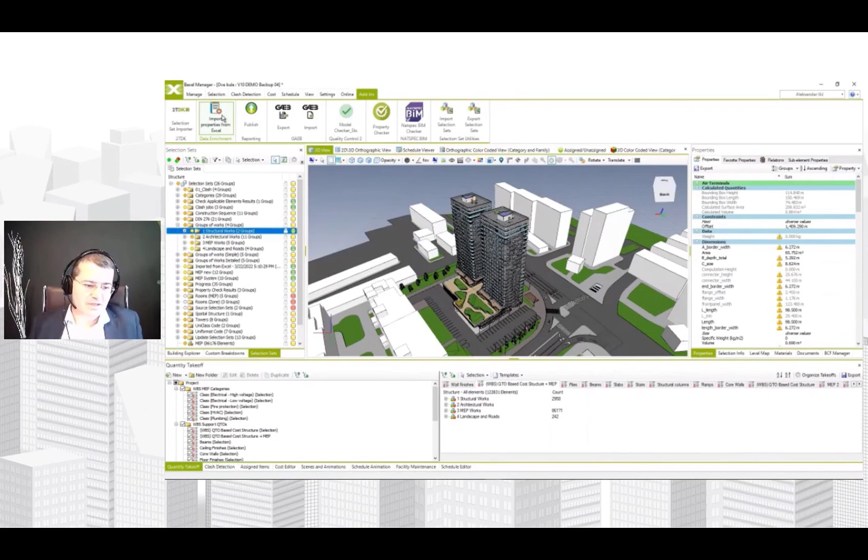When you have created a simulation - maybe Dan, if you can show the next video, that's going to be shown by our colleague on Thursday - this is how you use a BCF to send information to the site. This is a simplified look-ahead plan with all elements, but as I mentioned, you can divide this up per each subcontractor.

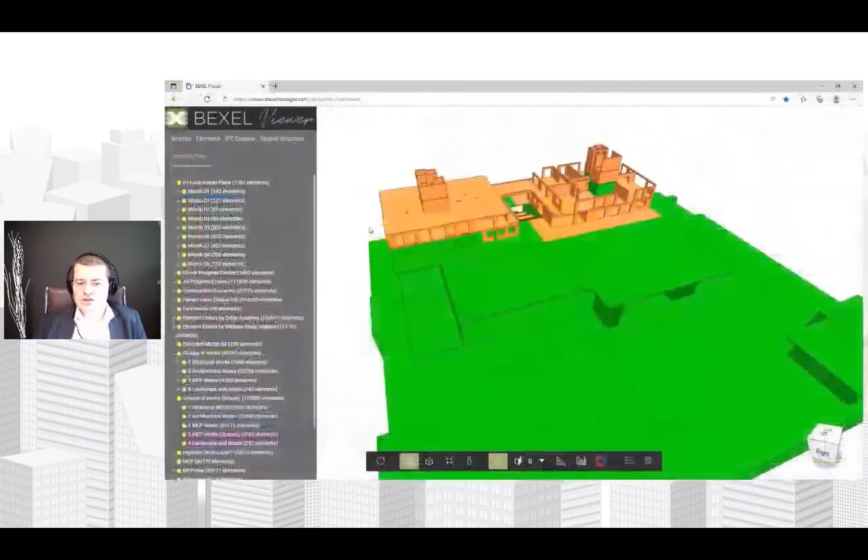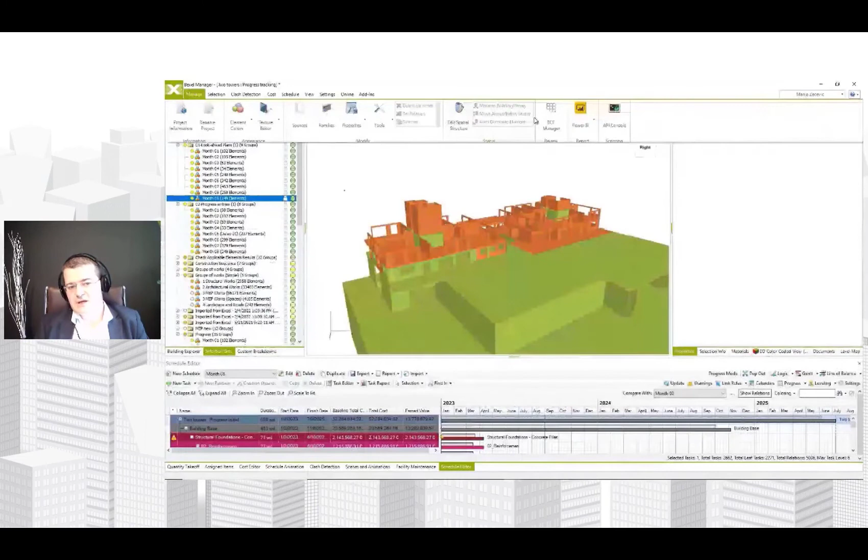This is how you load that BCF in Bexel Viewer and just fine-tune the schedule. For example, say certain walls have not been finished. When you do that, you send this back as information. This is the current status in a viewer. You send back this information as actual progress from the site.

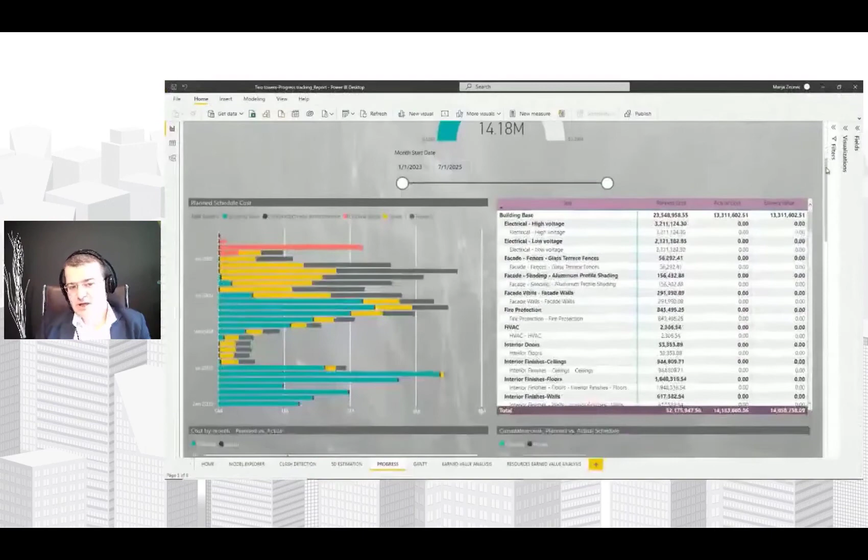Import this in Bexel Manager, and immediately have all quantities, immediately see. Because it's automatically done, you can also use RFIDs or any other way to track the progress automatically. You see all analytics, earned value analysis - these are reports exported into Power BI with all analytics.

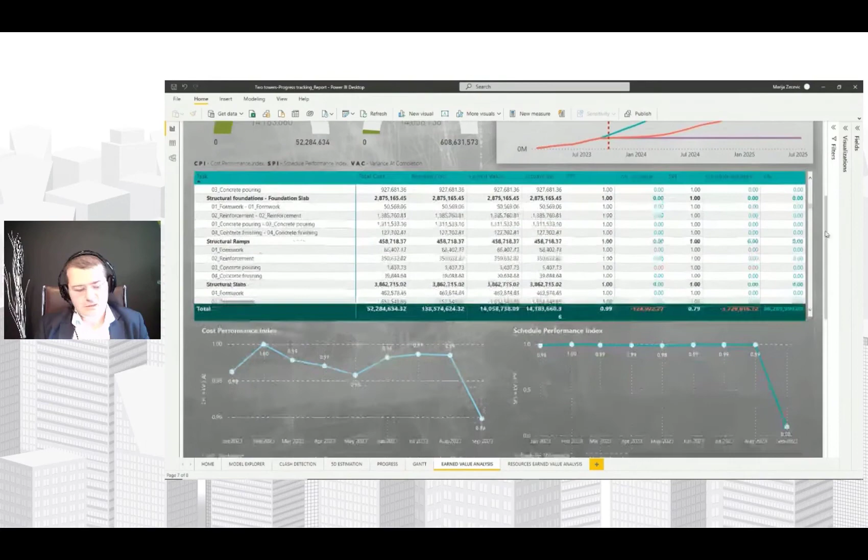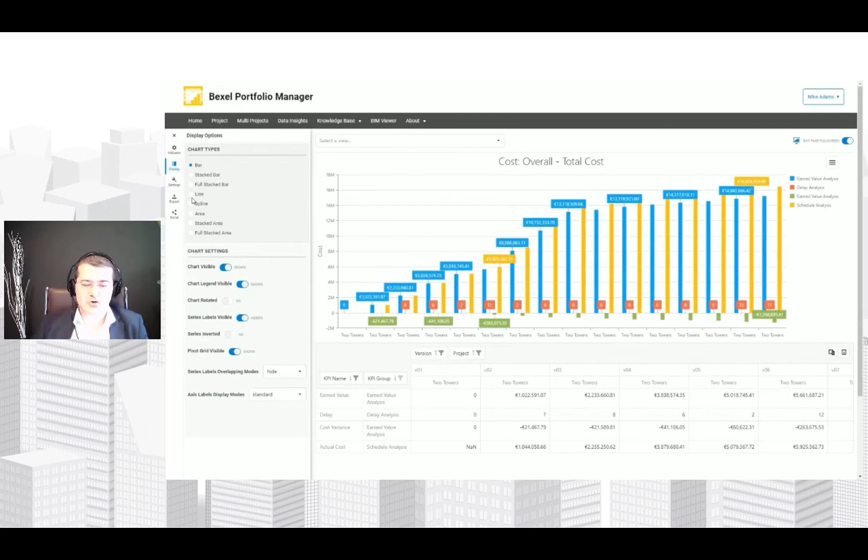And what's also interesting is the Bexel Portfolio Manager, which is a multi-project and multi-version environment. You can see delay analysis or various other analysis, or track the changes in your model when you update the files. The key benefit is also the ability to host all these server or cloud-based applications on client premises. We believe, in terms of data protection, that this might be beneficial.

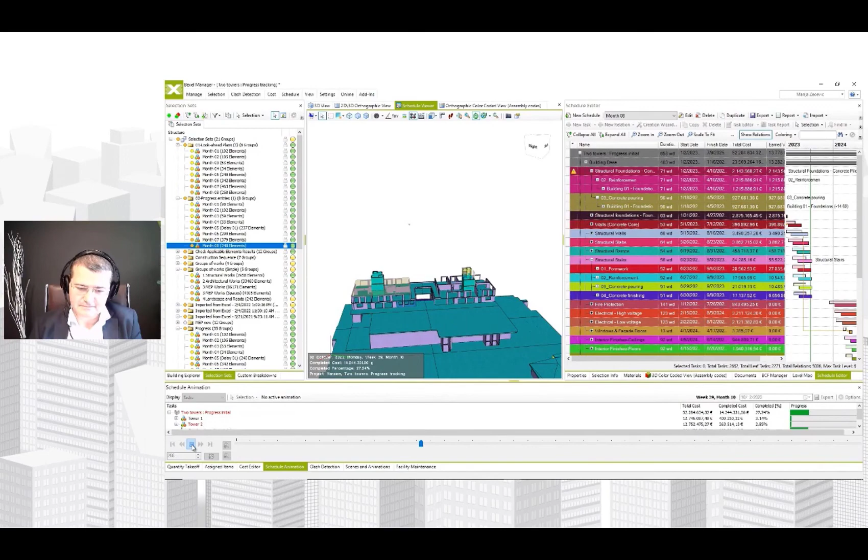Thank you, Veljko. We'll bring in Ken and Konstantino. We've got a few questions. The first one is from Edgar, asking how much of these use cases are captured in bSI tools, as shown yesterday.

Yes, I'd like to answer the question. Yesterday there was a session about use case management presented by Thomas, who counted up the number of usages of the use case management system. The total number of publications - meaning posts of use cases - is 76. Not much at this moment, but it is gradually increasing. The registered user number is 1,829, so I guess it's in the process of being used commonly and shared worldwide, but very locally, especially in the German chapter, people have enthusiastically started to use this system. That's the situation at this moment. Thank you.